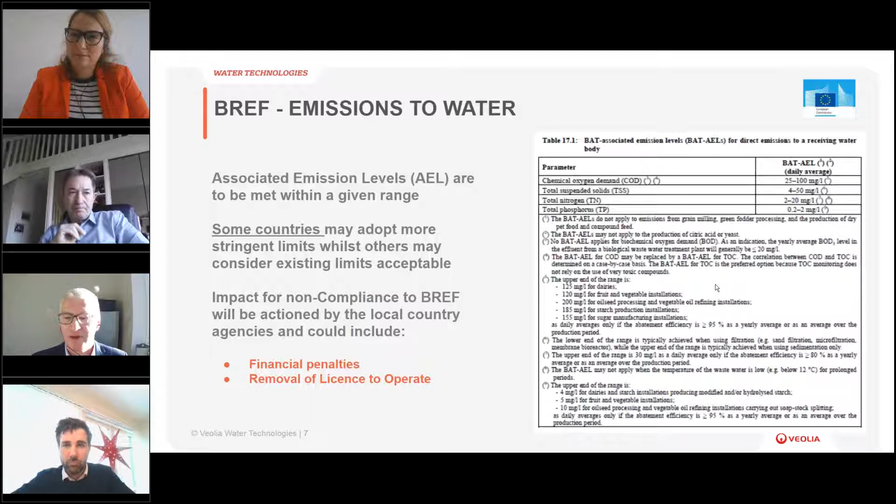So we've very briefly looked at the emissions limits. If we start to look at the actual best available technologies, so in the document there is a BAT, so best available techniques, conclusions and decisions, and this has been applied for food, drink and milk. And in total there are 37 BATs contained in this document, all relating to air, land and water.

The first 15, so 1 to 15, are really general and apply to all the food, drink and milk industry. And then 16 to 37, very much specific to certain sectors across brewing, oilseed, dairy and so on. As an example of that, BAT 21, 22 and 23 are specific for the dairy industry. So 1 to 15, very much general across the industry, and then really specific.

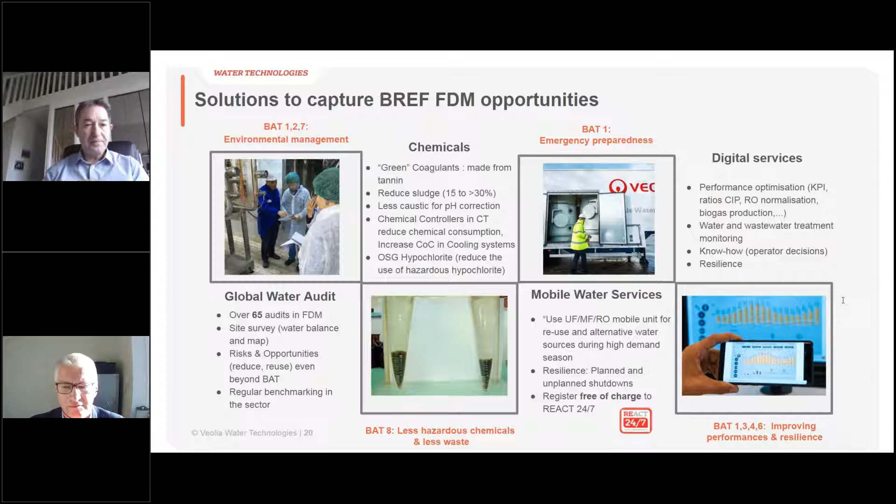As I mentioned, CIP is throughout the FDM industry a major production step.

Can you speed up a little bit, please? Yeah, okay, I will do my best.

We have seen increasing demand here as well in solutions to recover caustic, and it's possible to recover caustic. It helps you save, of course, on caustic, energy, and discharge costs on the effluent. Lab tests can be done, and are recommended to confirm that it works on site, and you can see you can recover very clean caustic soda.

We also have cow water recovery in the portfolio, and it's on the market, different technologies from hygienic polisher RO or from UF RO with a biological pretreatment stage if the load is too much. And it allows to reuse 90% as permeate coming from milk evaporators, to be precise.

MBBR is a technical solution to reduce the emissions to water. If you have an existing plant and, through BREF or other demands, you want to increase production, this is a way to improve and increase the performance of your existing conventional activated sludge plant.

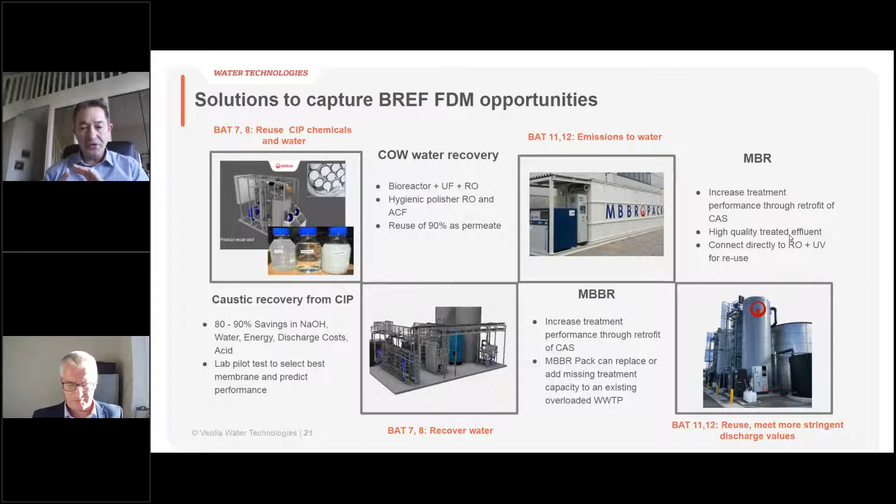And the same is MBR. MBR is a membrane bioreactor, and it increases the performance because it gives you one of the highest effluent discharge performances. Again, it can also be retrofitted to an existing activated sludge plant. And the nice thing is you can also connect it directly to reverse osmosis and UV for reuse. Next slide, please, Ivy.

Anaerobic treatment is probably one of the best fits for those objectives because resource efficiency and biogas and solid waste reduction are all in one, so to speak. You can also use technologies that allow you to reduce your sludge, your solid waste, because you can add it to the effluent and make biogas also out of your solid wastes.

We have a good database for the FDM sector, so a lot of things can be done without heavy piloting, or we can do a simple lab test to confirm performance. And for resource recovery, struvite can be done on the effluent of anaerobic treatment very easily.

Reclaim of effluent in general is done more and more, with the limitation that you have to, in most cases, segregate the sanitary effluent from the process effluent. But there are references, and depending on the legislation in different countries, more or less is possible to be done. And again, there are containerized plug-and-play solutions that can be added quickly on site.

I also like to mention reuse of different water sources like rainwater and air handling unit condensate. This is also done by ourselves. We have tools to predict what can be done based on internal weather databases and to optimize this process.

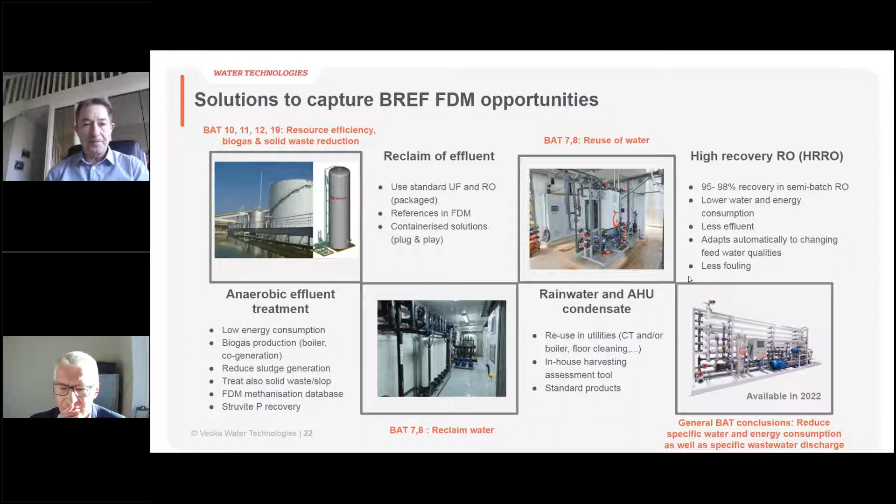We also have high recovery RO. They are on the market to improve recoveries above 75%, aiming for 95 and higher. They have the advantage of lowering, of course, the feed water quantity and the effluent, and also the energy consumption is very often improved. And it adapts easily to changing water quality, so very nice in reuse applications, where also less fouling is seen. Next slide, please, Ivy.

DAF is again very popular in the food and bev industry because it has the quality to treat everything that is oil, fat, and grease, which is very often in the water and upsets downstream processes. And here again, there are new technologies on the market where the white water is produced with less energy and also with reduced chemical demands. And 40% of the sites are actually concerned by indirect discharges and need to do, in some cases, some pre-treatment on site. So this is a good technology to look at.

We have also seen that weak acid cation water softening is entering into the industry. We have a first reference in the beverage industry. It's a technology that regenerates the ion exchange resin with CO2. And of course, this is now more and more in demand to reduce carbon footprint, and this is even a sink for carbon. It also has the advantage that it's not salt regenerated, so this will reduce any chloride in the effluent.

And we have seen that in the BAT, you now have to monitor chloride once per month. So maybe in the future, in the next revision, there are some effluent limits to be expected.

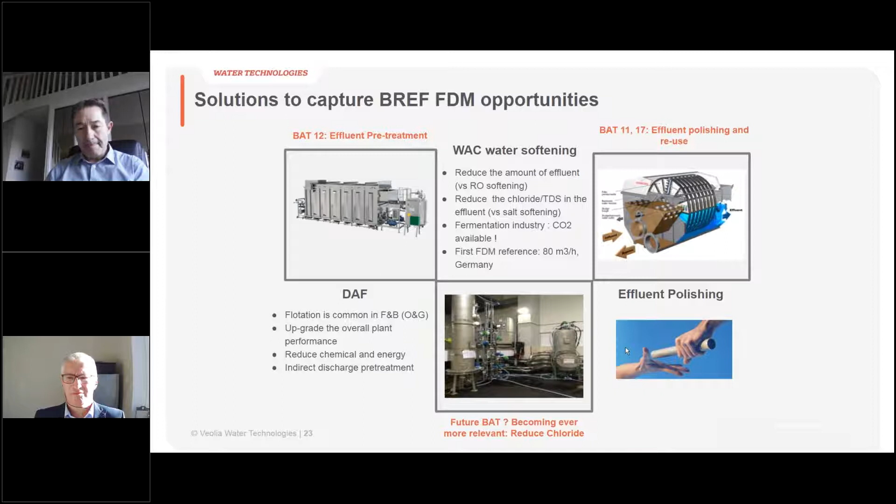My name is William Blandford, and I want to tell you about our spotlight product for this BREF campaign. It's the Hydrotech Nutri-Pack. Before I go into the details, please enjoy this short video giving an introduction to the solution.

Do you see the video, William? Not yet. Oh, here it is. I think it's coming. Okay. Yes. Can you please go to the next slide, Evie? Here you are. Yes. Thanks.

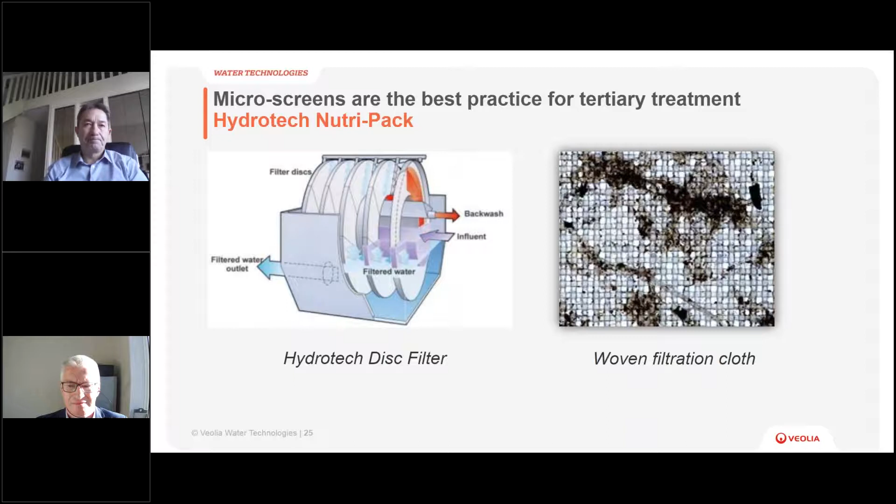Beyond the compliance aspect, the decision of where to dose coagulant becomes a CapEx-OpEx trade-off. Dosing coagulant upstream of the clarifier will have a lower CapEx investment. Dosing coagulant downstream of the clarifier means that the dose concentration can be optimized. Reduced organic material downstream of the clarifier for the coagulant to react with means much less dosing is required.

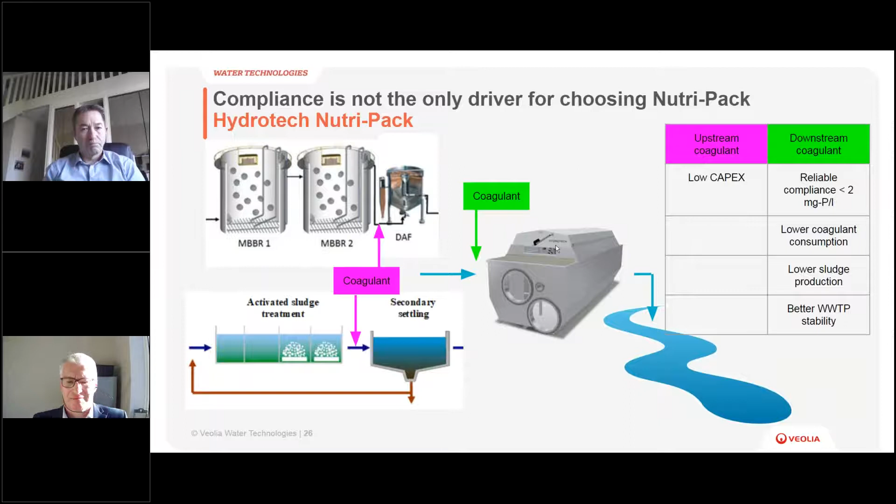Next slide, please. Evie? Ivy, next slide, please. Yes, we didn't hear the last sentence. Sorry.

Okay. I was just mentioning that at Veolia Water Technologies, we have chemical experts who can help you optimize the dosing parameters, and we also have tools to help calculate the return on investment of new investments.

But what I want to mention on this slide is basically why we developed the Hydrotech Nutri-Pack. The feedback that we were getting from the market was that the microscreen filters installed at industrial locations were causing customers some headaches. Because of our strong success delivering well-functioning plants to the municipal sector, we had basically copied and pasted the design approach. But industrial wastewater plants are not the same as municipal plants. There are huge swings in organics and nutrients, which demand a system that can be both responsive and robust. We realized that we need a dedicated product for industrial customers.

Our market research has also revealed that site works are very expensive at the moment. With the package plant, you can avoid concrete and labor costs. The equipment is quick and easy to install. It can be up and running at your site within 16 weeks of an order confirmation and will not affect day-to-day operations.